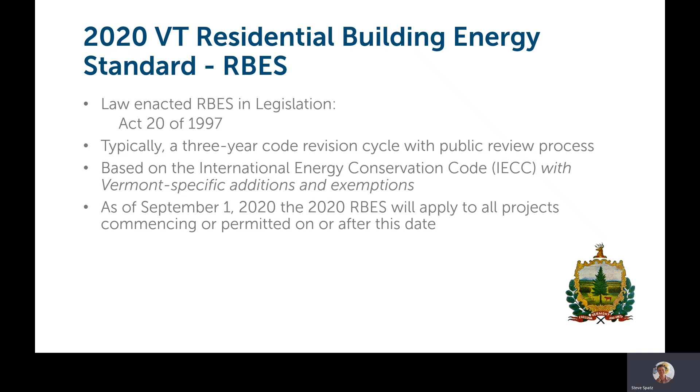The current code was put into effect as of September 1st, 2020. So any new buildings or additions, alterations built or enacted after September 1st, 2020 need to meet the requirements of the 2020 code.

There are 2 reference documents in regard to the RBES. There is the full language of the ICC published code, which can be found on the ICC website and through links on the Department of Public Service websites to get you there as well. And then Efficiency Vermont also publishes, in partnership with the Department of Public Service as the Energy Code Assistance Center, a handbook, which is a guide to interpretations of the code and how to apply the code for builders.

So an important distinction to understand. The full code document from the ICC is what should be referenced to ensure that a building is being built compliant specifically to what the law requires. So the handbook is an excellent guide to move you along that path, but the ICC document should be what is referenced for the law. Accessing this content, you can find this both through Efficiency Vermont's Trade Partners site, as well as through the ICC site directly, and the Vermont Department of Public Service website.

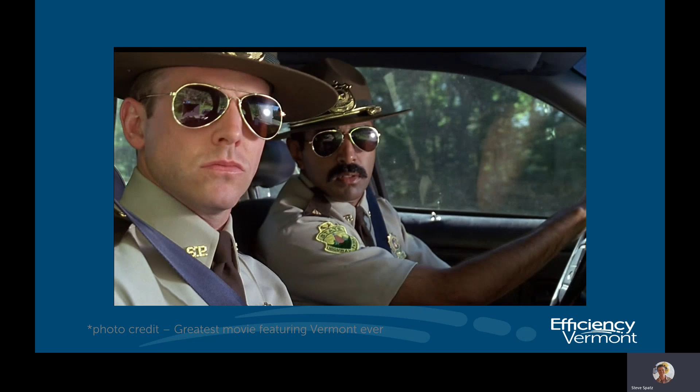So Efficiency Vermont's role is we are not the code police. We are here to support the understanding and application of code in Vermont. We support and run the Energy Code Assistance Center. So you can call this toll-free number to reach one of our customer support representatives who can help answer questions in regard to the code and or connect you with an energy consultant such as myself or someone else within Efficiency Vermont who can get into more detail with you in regard to code questions.

The Vermont Department of Public Service is the regulatory entity that basically owns the code here in Vermont. So any questions about the actual application of the code and implementation of the code would be directed to the Vermont Department of Public Service.

So 2020 Vermont RBES. Buildings that must comply are any new construction, low-rise residential buildings. So 1 and 2 family dwellings, any multifamily housing that's 3 stories or less. RBES does not cover commercial buildings. They are covered by the Commercial Building Energy Standard, which is revised on the same schedule as the RBES. If you have a mixed-use building with commercial application on the lower street level and then residential units above, both codes come into play in that circumstance.

Additions are treated as new construction buildings, so the addition needs to conform to the requirements of the 2020 RBES as if it were a new home. That does not mean that the rest of the building needs to be brought up to meet the requirements of the current code. Only the addition needs to conform. Renovations and alterations have their own requirements that are defined in Chapter 5 of the code under existing homes, as are repairs as well.

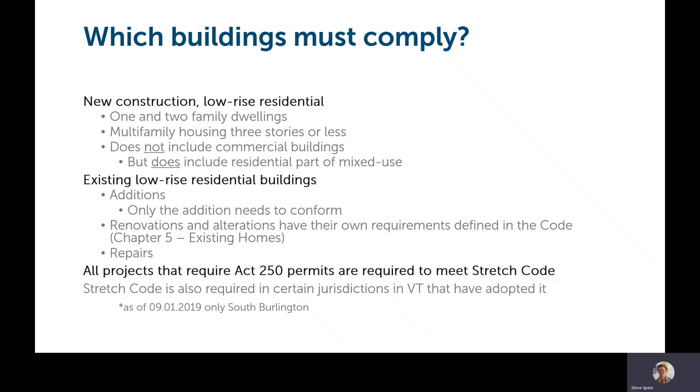If the project falls under the jurisdiction of Act 250, whether it's a development or if it is a specific circumstance where there's an Act 250 umbrella over the project, stretch code needs to be met, which is a higher level of performance than base code is requiring. And also the city of South Burlington has adopted the stretch code as their local requirement, more stringent than what the base code requires.

There are some exemptions in the code. Any unconditioned building, outbuildings, sheds, unheated garages, etc. Those are considered unconditioned buildings. Mobile homes have their own federal requirements. Seasonally heated or conditioned buildings, so that are not meant to be lived in year-round, and owner-built homes.

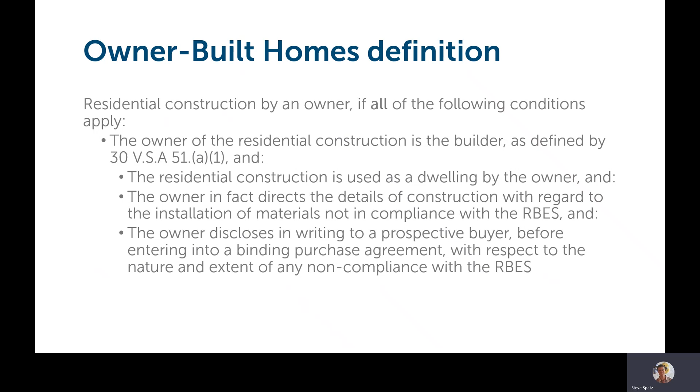Owner-built homes have their own distinct call-out in the code that is very specific. So if you are planning to build your own home, general contract it yourself, and live in the home upon completion, you're allowed exemptions from meeting the full compliance with the RBES code. You still need to complete a code certificate that details what was installed in the building, but there is an allowance there for alterations away from the strict requirements of RBES.

Liability is where the teeth of the code comes into play. There are no code officials in the state of Vermont. Efficiency Vermont is not a code enforcement entity. There is not that mechanism or regulation set up that way in the state. So unless there is a local code official who is overseeing construction in their jurisdiction, it is entirely up to the builder to verify and show compliance that the building has met the requirements of RBES in full.

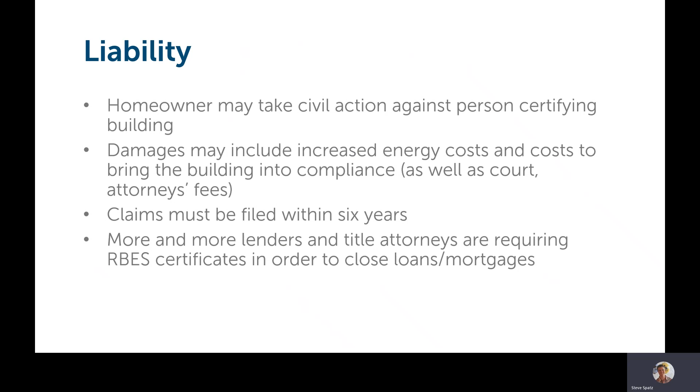A homeowner may take civil action against the builder or the person certifying the building as compliant with the code, or lack thereof, if they never completed the code certificate nor built the building to meet the standard. These claims can be filed within a period of 6 years. It doesn't mean that after that 6-year period a builder may not be liable for faults identified in the building that can be linked back to non-code compliance, but it would not fall under the direct jurisdiction of an RBES filing at that point.

There's two main components to the code. There's the performance requirements, which we'll cover in detail as far as the actual specifications for how the building is put together. And then there is a reporting compliance requirement, which is actually completing a certificate that details the components of the building and verifies that the building has met in full the requirements of the RBES. That document is required to be completed in full by the builder or engineer or whatever entity is basically in control of the outcomes of the project.

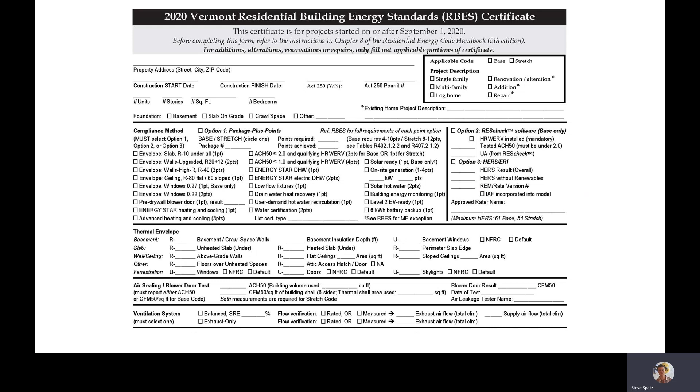This document needs to be completed in full, signed, and then a copy of it filed with the town that the home was built in, or the retrofit, or whatever applicable project type was done in. It needs to be reported in the town records, and then a copy of the code certificate also submitted to the Vermont Department of Public Service for public record. And then a copy of this certificate will be posted within the home, somewhere in a conspicuous area, typically in the utility room, that will stay with the home.

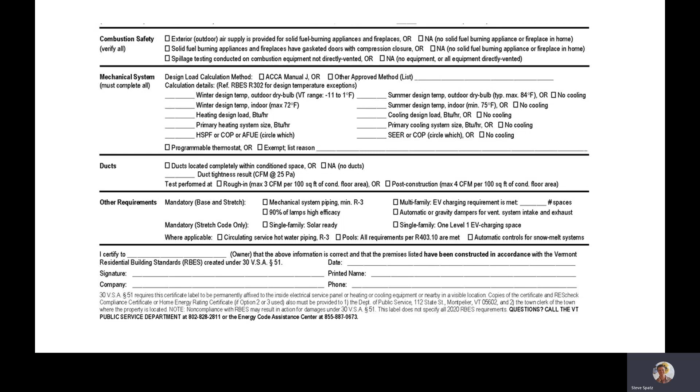So, general requirements structure for how the code is put together. The Vermont RBES is laid out in the manner that typically all model codes written by the ICC are. It's written as a design document. The chapters basically go from design and specification through to project completion. So if you reference the code that way at the design stage, rather than trying to figure out how the building met the code upon completion, you'll have more success in actually meeting the full requirements of the code.

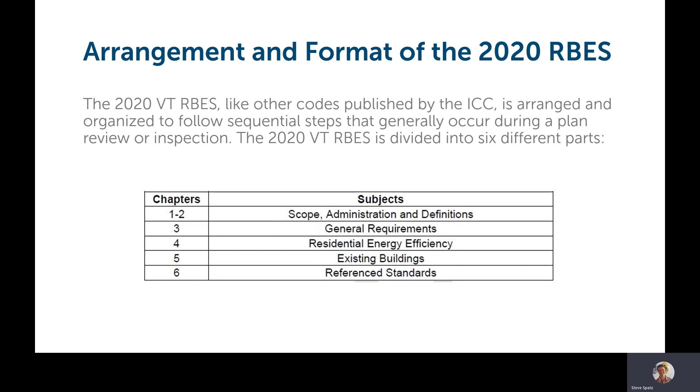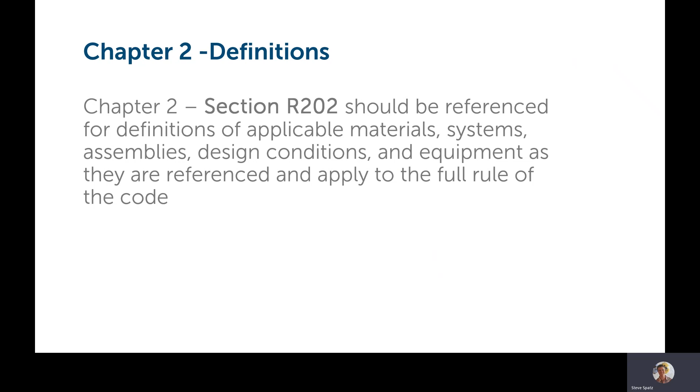So there are 5 chapters of content, and then the 6th chapter has reference standards that are used within the document. Chapter 1 is scope and administration, basically covers the administrative side of the code. Chapter 2 is essentially a glossary of terms, materials and conditions. Basically anything referenced in the code is defined in chapter 2. Chapter 3 covers details for design conditions and mechanical and material systems to be used in the building, design criteria for whole house ventilation systems, and details around combustion safety.

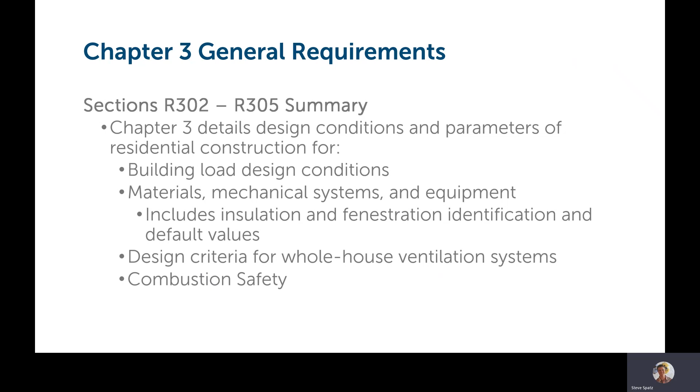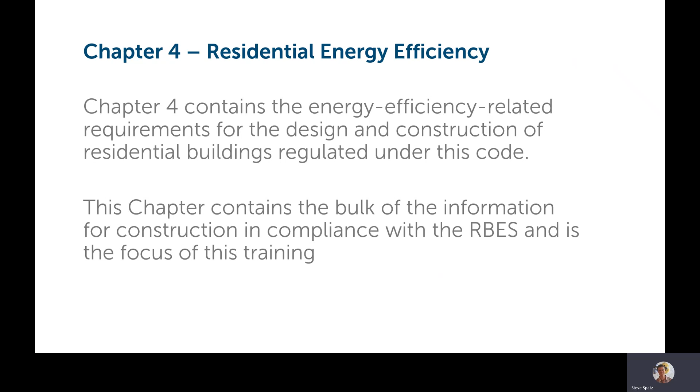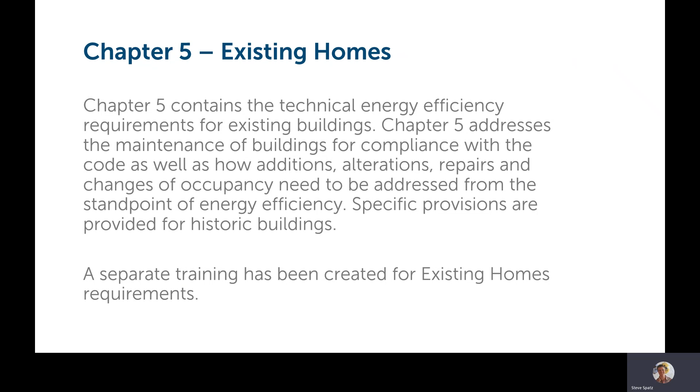The bulk of the performance requirements in the code are contained in chapter 4. This is where most of the actual specification and installation requirements are detailed. Chapter 5 is specific to existing homes and basically references back to content in chapters 3 and 4 and how they apply to an existing building project, whether that's an addition, alteration, repair, or change of occupancy. Then finally, chapter 6 is just an index of industry standards that are referenced in association with the requirements of the Vermont RBES.

So getting into the details of the actual specification and compliance requirements for new construction and additions. The reference section numbers come directly from the ICC code document. So if you look into the ICC website and look for these section areas, you'll be able to reference the full content from the code.

So there are 3 options to comply with the code. You have a package plus points or prescriptive compliance method that is allowed. That's detailed in sections R402 through R404. Alternatively, a builder can choose to use REScheck software, which is an online web-based energy modeling tool that you input your building component specifications to, and it will give you a numerical index as to whether or not what you're planning to build and those specifications will meet the intent of the code or not.

And finally, the third option to show compliance would be to work with a third party by hiring a home energy rater or HERS rater who will do building energy modeling and verification of measures installed on behalf of the builder, and essentially provide the builder then with documentation upon project completion that will be used to show RBES compliance.

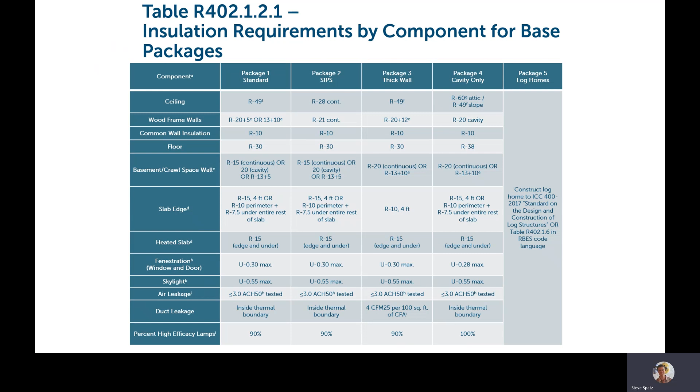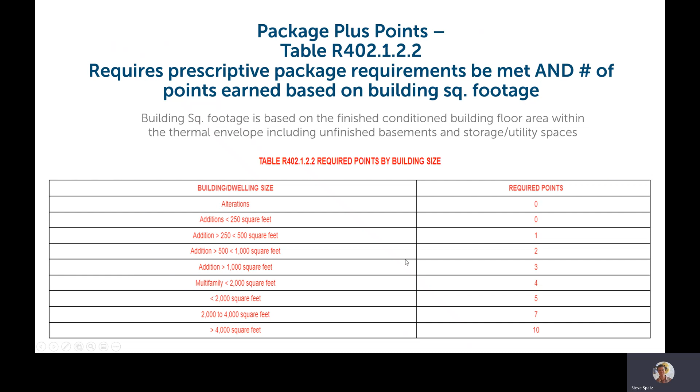From here, you need to earn points that improve the outcomes of the building beyond what's called for in those prescriptive packages. And those points are based on the square footage of the home. So this table, R402.1.2.2 in the ICC code, gives you the parameters of points needed based on size of the home. So the bigger the house or the addition, the more points are needed.

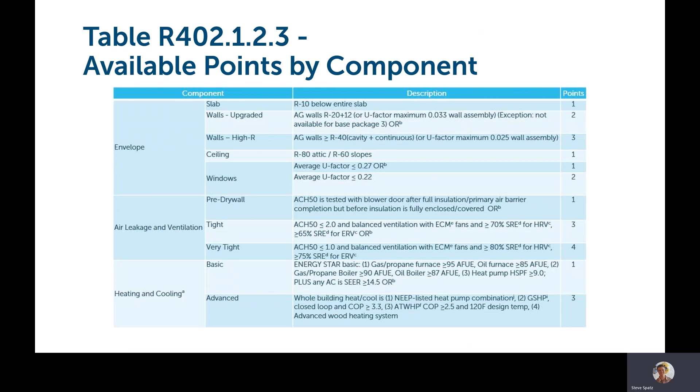That's followed by another table in the code, which gives you your options for obtaining points. So you can improve aspects of the building envelope to obtain points. You can improve the air leakage rate of the building envelope by making the building tighter and putting in balanced ventilation systems to gain points. You can put in efficient heating and cooling equipment to gain points. You can install low flow fixtures within the home as a way of gaining points, options with renewable energy and other forward-thinking measures that can obtain you points as well.

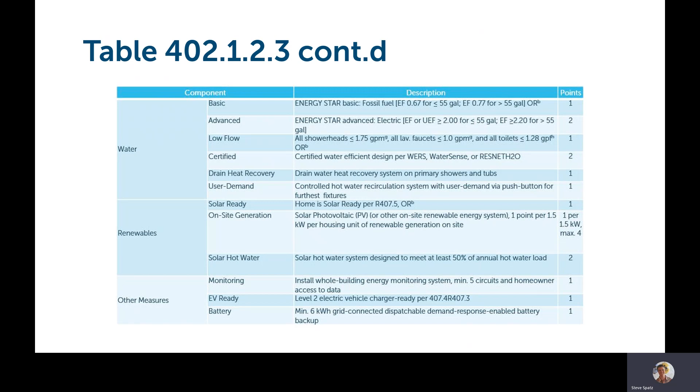So that is the requirement. You need to pick a package, meet the full specifications outlined in that package, determine how many finished square feet the building is, and figure out how many points you need to obtain, reference this table to obtain those points, and then follow the installation mandatory requirements, which we'll cover here momentarily.

Alternatively to that prescriptive package approach, as I mentioned, a builder can choose to use REScheck software. This is detailed in section 405 of the code. So this is in place of following the specifications in one of those packages. The builder can go to the site that hosts the REScheck software, which can be found at this link directly, or you can go to the Vermont Department of Public Service website and be linked to that REScheck software from there.

And then this gives you the option of inputting performance criteria into the software and kind of trading options to show whether or not your building meets the standard based, again, on a numerical comparison of what a base compliant code would require versus what your specifications are that you're inputting into the software.

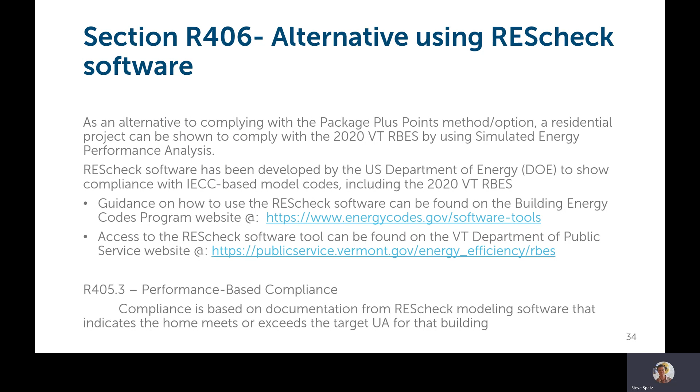Finally, as an alternative to that, again, is to work with a third-party HERS rater, which would mean hiring a RESNET certified rater who will take your plans and specifications, again, ideally at design stage, to review. They will be able to do a preliminary rating for you at that point, which will show where your building plans and specification land in reference to code compliance and whether or not what you have designed will meet, in fact, the code if it's built.

At that point, you can make any adjustments or changes to the building specifications to make sure that it complies with code. And at that point, you can move forward confidently with construction, knowing that what you're building will comply with the code upon completion. This method requires that HERS rater come in and do a mid-construction inspection after insulation measures have been installed, and then come out and do final performance testing on the building and documentation in order to provide the final documentation to show code compliance.

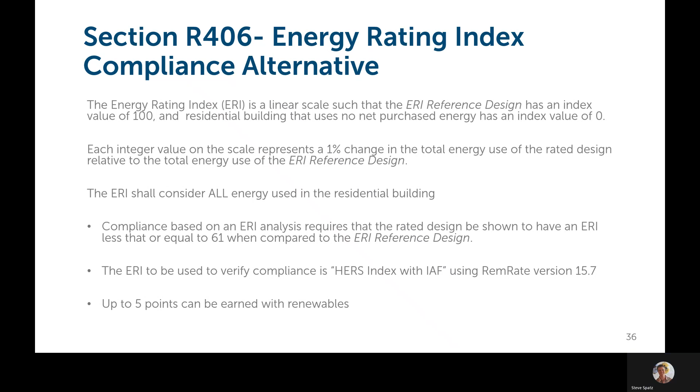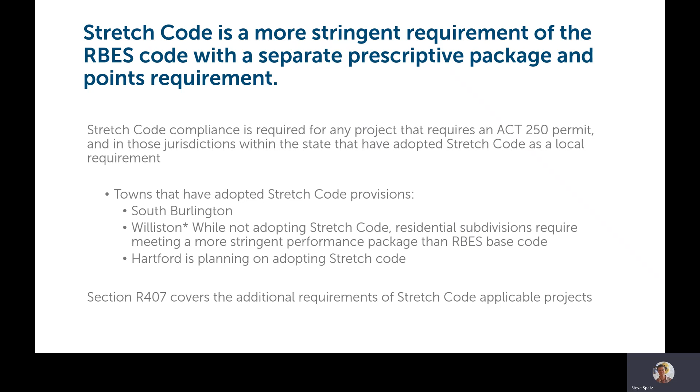Stretch code, again, comes into play if you have a building that is being built that lands within the jurisdiction of an Act 250 permit, or if you're building within the town of South Burlington, as South Burlington has adopted stretch code as their local requirement. So stretch code essentially is upping the ante on what the base code requires. So you can meet stretch code prescriptively by using the package plus points approach, though you're limited to 3 packages instead of 5 with stretch code.

And you can see here in stretch code that you have to do continuous insulation on above grade walls, whereas the base code in package 4 allows you to just still do cavity only insulation. It requires you to have a little bit better foundation wall insulation, depending on the package, a little bit better windows, and more importantly here is you're required to put in balanced heat recovery ventilation, whereas base code you're still allowed to use exhaust only if you so choose.

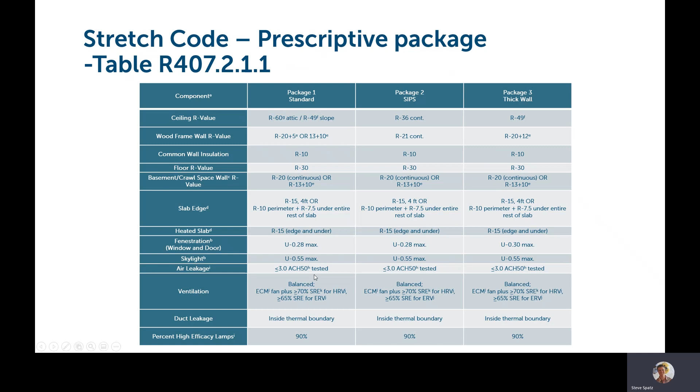So same approach here, you pick one of the 3 packages, meet the full criteria of that package as your base requirement. Then depending on the square footage of the home, you need to obtain points again from a separate table based on the square footage. I don't have that other table shown here, but there is a specific table in the code for stretch code that looks the same as the base code points table, but is specific to stretch.

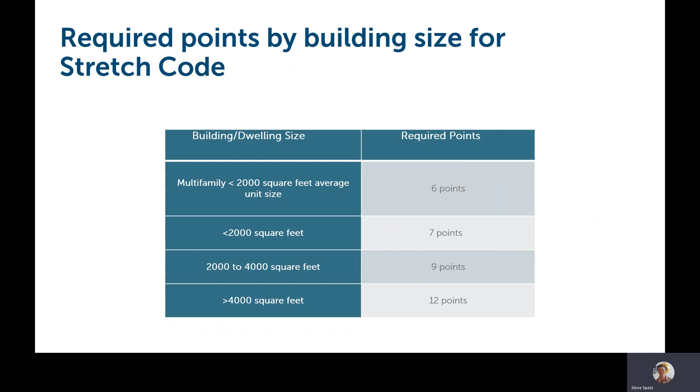One difference with stretch code compliance is that you cannot use REScheck software to show compliance for code. You have to either use the package plus points approach or hire and work with a HERS rater to show compliance. So you're restricted to those 2 compliance options when needing to comply with stretch code. So package plus points approach, again, same as base code. Pick one of the 3 packages, determine the number of points, and then incorporate a sufficient number of those points into the building specification from the specific stretch code table to show compliance.

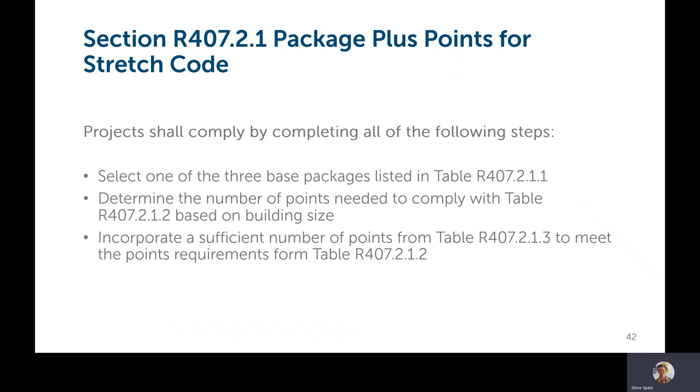The difference in the HERS score requirement for stretch code is that base code, you need to have a maximum HERS rating of 61, whereas for stretch code, that maximum HERS rating is 54.

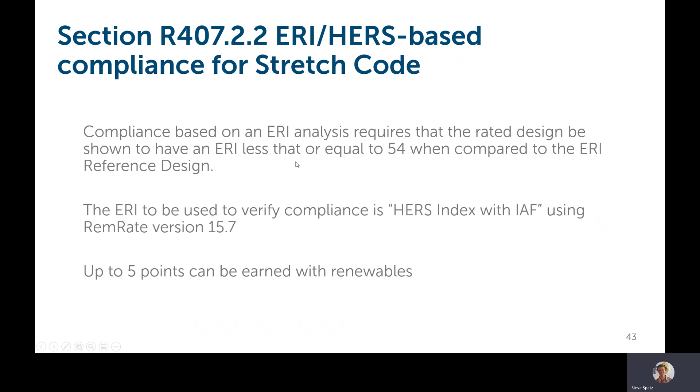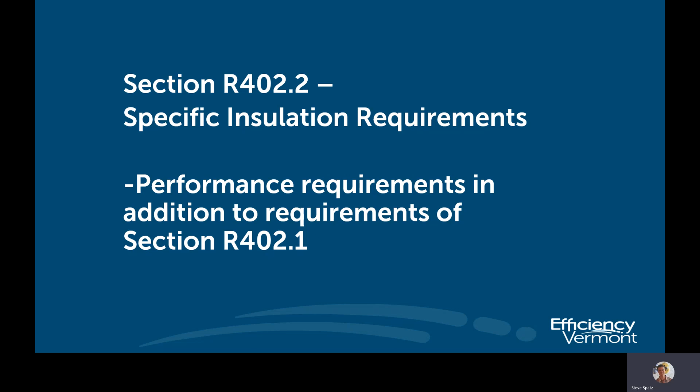So that details the specific component requirements for meeting the code, as in R values and U values and air leakage rates, et cetera, for the building envelope. But then there are also mandatory performance requirements that are called out within the code. So this essentially means how materials and systems and equipment is installed in the building so that it actually performs in a way that's designed to work. So this section covers some of the more distinct or prominent mandatory details and installation requirements called out in code, but it's not a fully inclusive list. So the full list of mandatory requirements can be found in this section R402.2.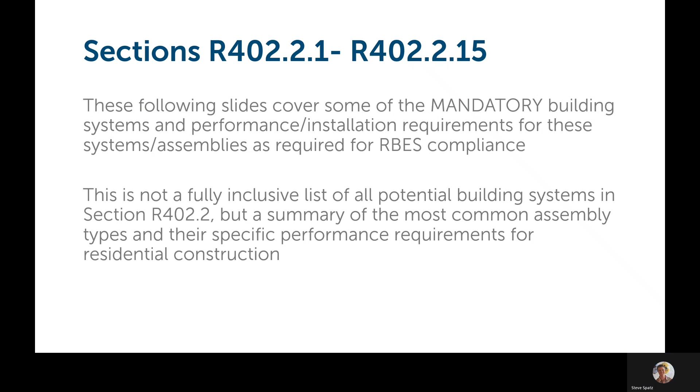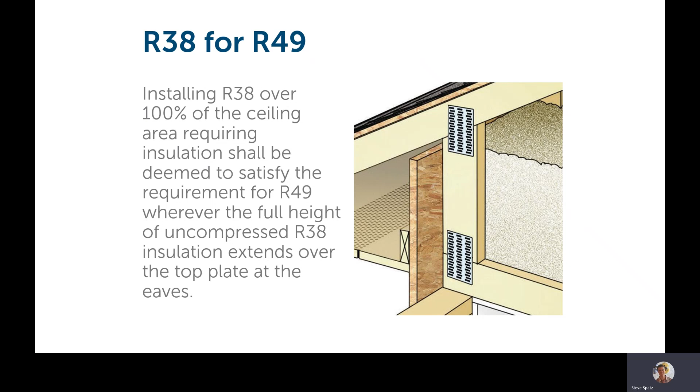So we'll start with an exemption. So where the code requires in the prescriptive tables a minimum R value for an open attic space of R49, R38 is permissible if that R38 insulation carries fully over at full height, uncompressed over the top plates of the exterior walls. So that's an allowable exemption to R49, is to have a uniform thickness of R38 throughout the whole attic space. The same exemption exists for R60, where R49 can be allowed, again, if it's a full uncompressed height over the top plates of the exterior walls.

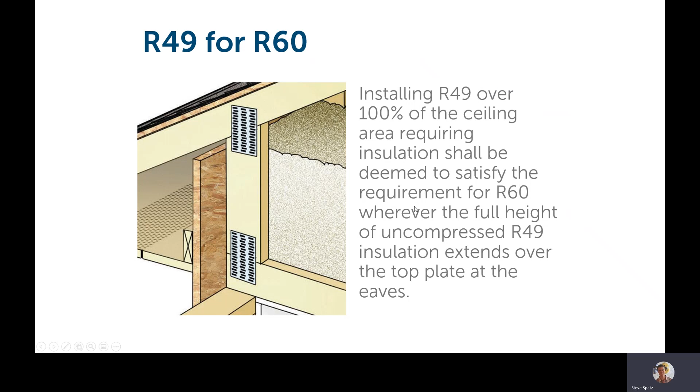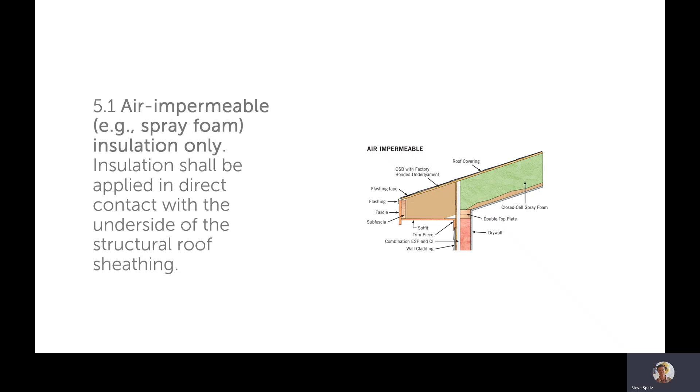Section R402.2.1 covers in detail unvented roof assemblies. So again, R49 is the minimum R value for any roof assembly, attic assembly, whether it's an open attic or if it is an enclosed rafter assembly. So there are 3 options for doing unvented enclosed roof assemblies. One option is air impermeable insulation. So essentially closed cell foam to fill the cavity to an equivalent R value of R49, whereas that insulation needs to be in direct contact with the underside of the roof deck.

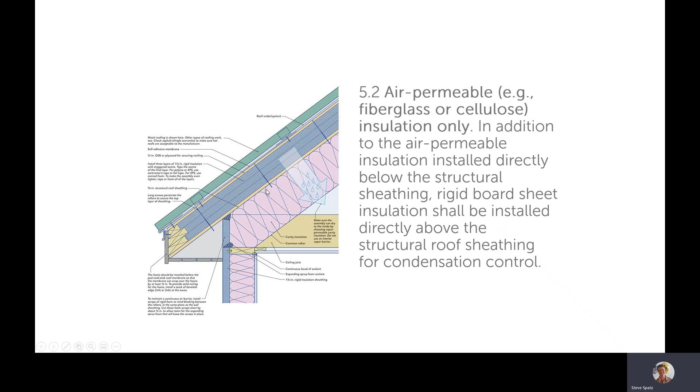An alternative to that is to do cavity fill insulation within the rafter cavity of any insulation type, and then add what is equivalent to half of the R value of what's in that cavity in rigid insulation board above the roof deck to prevent the roof deck from becoming a condensation point within the overall assembly. So that's another alternative for unvented roof assembly.

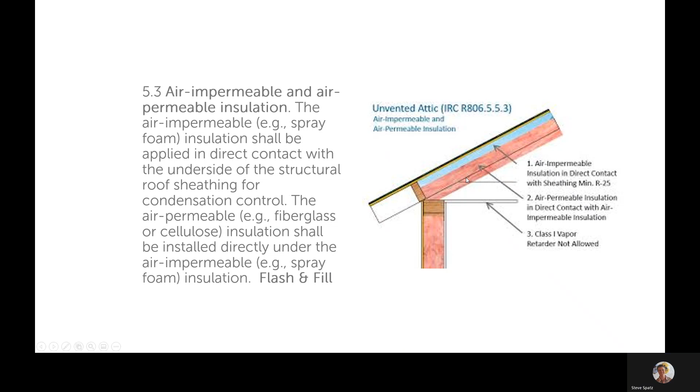And then finally, a mix of air impermeable and air permeable insulation, more commonly known as a flash and batt or flash and fill insulation, where you're getting half of the overall R49 R value in a closed cell foam insulation that is in direct contact with the roof deck. And then the balance of the R value is made up with another insulation type of fiberglass, cellulose, rock wool, open cell foam to get to your R49 minimum.

Eave baffles are required in any attic or roof assembly type to prevent wind washing from the soffits and the eaves. So this is a mandatory requirement for any attic or roof assembly.

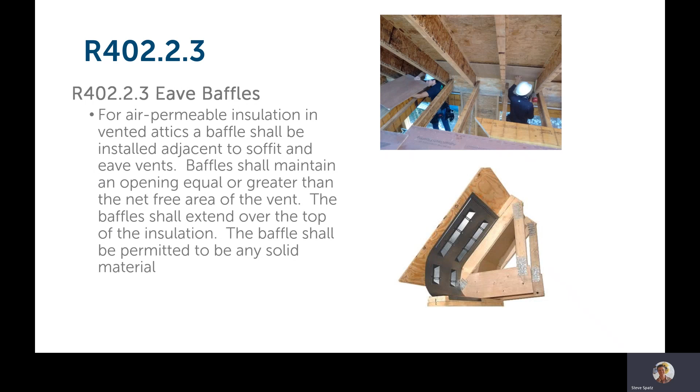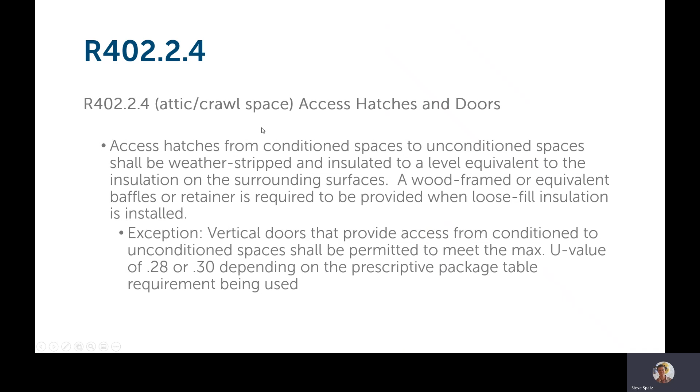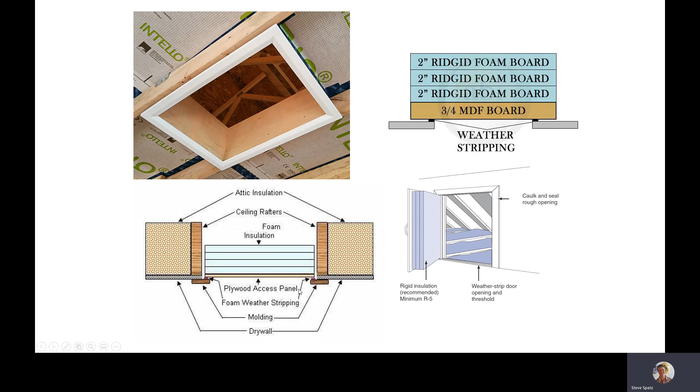Access hatches or doors need to be treated as exterior entry points to unconditioned space. So they need to be treated in a manner of equivalent R value to the assemblies that they're being installed in. So an equivalent R value or close to it of what the R value requirement is for the knee wall or attic space that the access hatch is located in. The access hatch needs to be installed against a compressive weather stripping to prevent air leakage through the panel and getting around that to the outside.

Any exposed floors that are over truly unconditioned space or cantilevered floors require that the insulation in those cavities be in direct contact with the conditioned side of the assembly. So the warm side of the assembly, there cannot be an air gap between the insulation and the finished floor above.

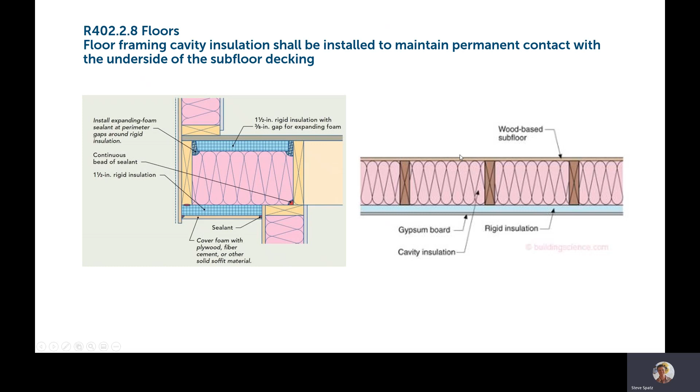Foundation wall insulation needs to be at a minimum of 10 feet, basically the full wall height to 10 feet. So if you somehow have a foundation wall that is greater than 10 feet, the insulation needs to at least come down to 10 feet below grade or to full wall height if it's less than that.

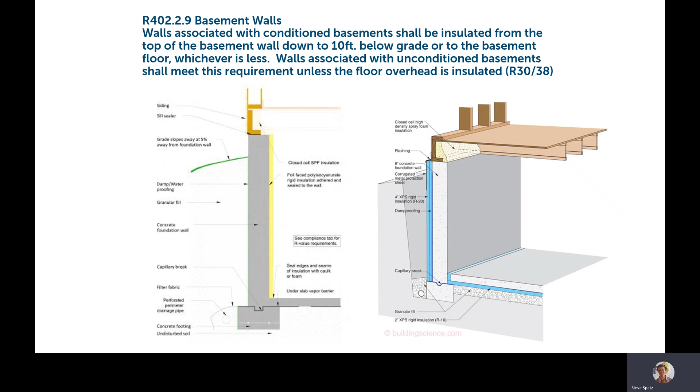There are no requirements as to where and what side of the foundation wall foundation insulation is applied. It can be installed on the inside, it can be installed on the outside, it can be installed in between. It can be a framed wall with cavity fill insulation. So there are many options for insulating foundation walls.

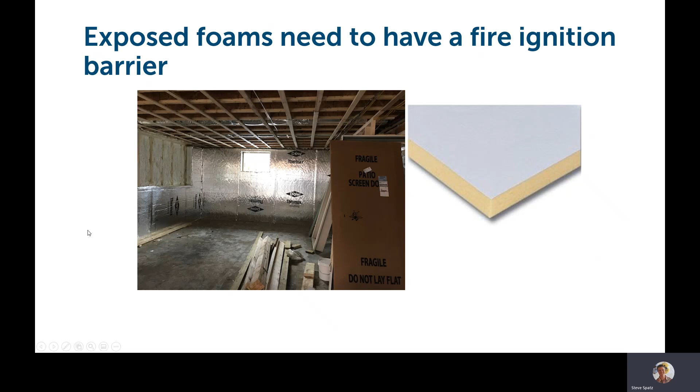Any exposed foams that are within a space that is accessible to the occupants or for service needs to have an ignition barrier facing on the foam or something else covering it to prevent ignition of the material. So this goes for open attic spaces where exposed foams would be in place, knee wall access points, basements, crawl spaces, etc. So the ignition barrier needs to be in place over the exposed foams.

Slab on grade floors. So a slab on grade is considered any floor surface that's less than 12 inches below grade. Needs to be insulated with the requirements called out for in the prescriptive tables of R15 down to a minimum of 4 feet. And that 4 feet can be either vertical or it can be a combination of vertical and underneath the slab. So you basically need to insulate at least 3.5 to 4 feet below the slab at the perimeter of any exposed foundation or slab. So this applies for a slab on grade home or a walkout section of a basement in a full basement type setting.

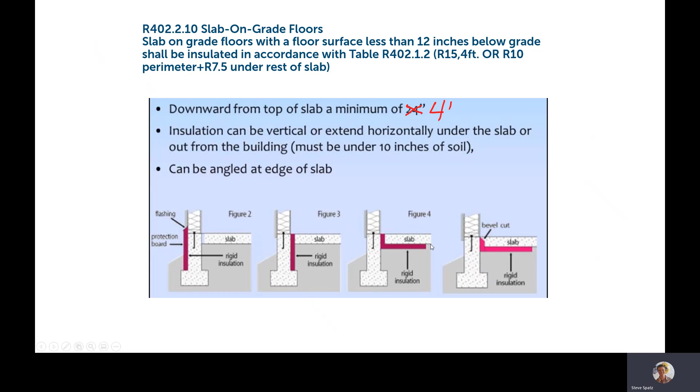There is an exemption in the table R402.1.2 for R10 as the vertical slab edge insulation, and then R7.5 underneath the entire slab as an alternative to doing R15 at the slab edge only.

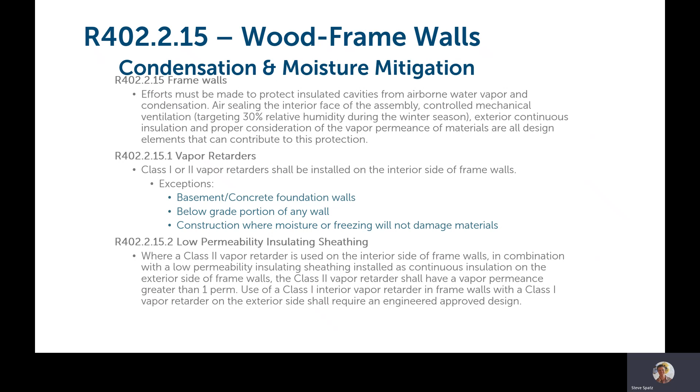Condensation and moisture mitigation in wall assemblies is a bigger part of the picture of the building science side of the code, and there are specific requirements called out in the code in regard to vapor retarders. So different classes of vapor retarder types, class 1, 2, or 3, depending on the wall assembly over which that vapor retarder will be installed. But measures need to be put into place to prevent the bulk loading of interior moisture vapor into building assemblies to prevent the concern of condensation from occurring within these building assemblies.

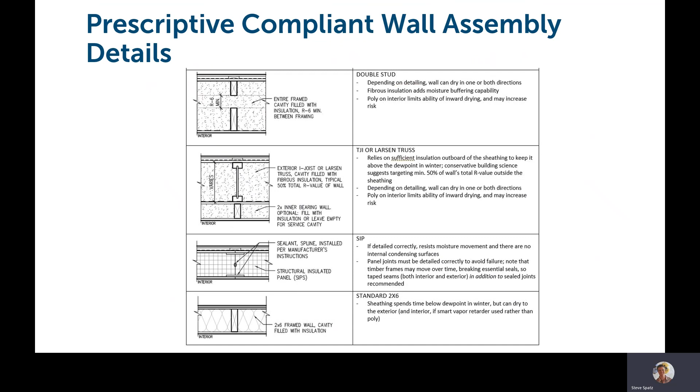There's a lot of good content in the code handbook that I mentioned that goes into detail about moisture safe building assemblies. So there are these construction details illustrated in the handbook, different ways of approaching continuous wall insulation assemblies that are considered moisture safe, condensation safe. So a great reference to have and to look at in interpretation of the code. And then there are also some examples of what not to do when doing continuous insulation as well.

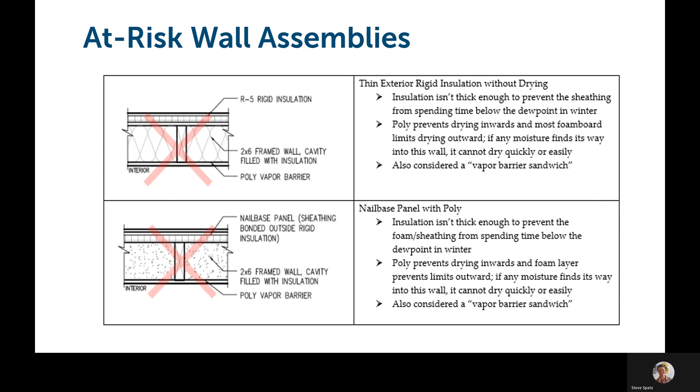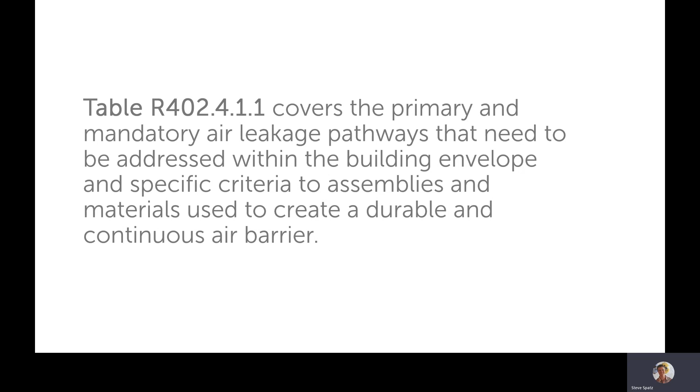Section R402.4 details the specifics of the air leakage requirements for the building envelope. So this covers the primary and mandatory air leakage pathways that need to be addressed in the building envelope to meet the 3 ACH or 2 ACH criteria that are called out in base code and stretch.

So this section covers in detail the different material types that can be used or should be used as air barrier material and the ways of combining those materials together to create a uniform, unbroken barrier around the full perimeter of the building envelope.

The 2020 RBES does require that the air leakage of the building envelope is tested and verified upon project completion by a third party to verify that the building does in fact meet the 3 ACH or 2 ACH maximum air leakage rate. So this is no longer just a builder verified component of the code. It is actually something that needs to be done by a third party blower door test to verify and document that the building did in fact meet those maximum air leakage rate requirements.

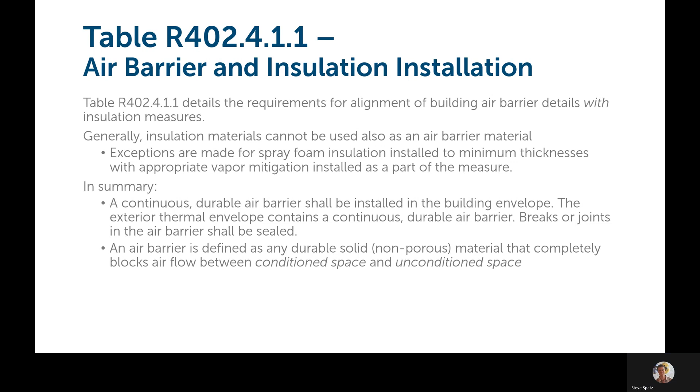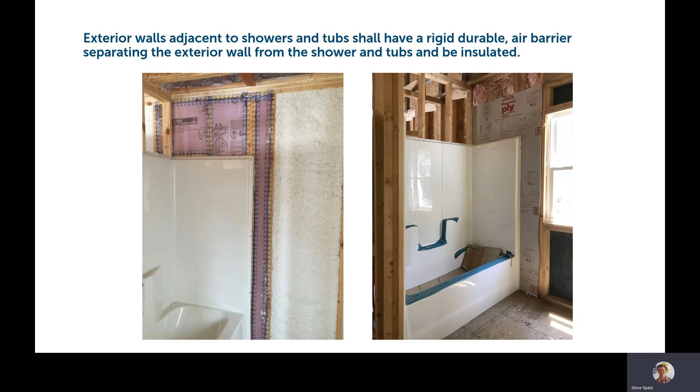So these are just some details to be aware of within the building that are specifically called out. So any shower or tub assembly that's adjacent to an exterior wall needs to have a rigid air barrier separating the bathroom space from the cavity insulation behind it. Otherwise, that wall is guaranteed to have moisture and mold and potential structural failure at some point in its future.

This is another image pulled from the RBES Handbook. So these are two illustrations of section details that show specific details of how to do an exterior defined air barrier versus an interior defined air barrier. Again, it's an assembly of parts, so it's important to understand where the different details come into play to make it uniform.

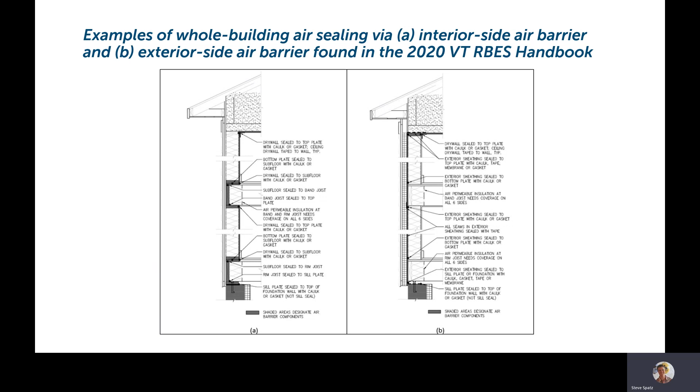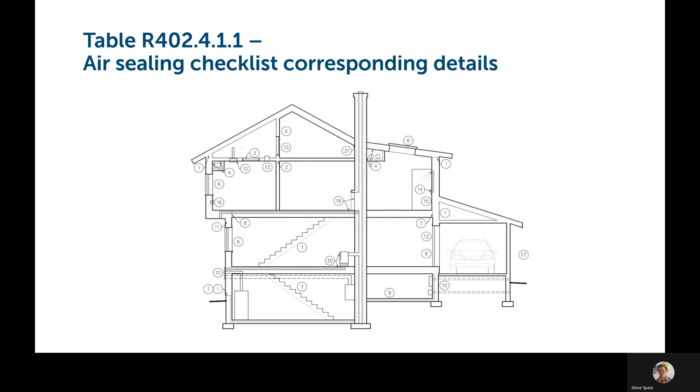As well, in the handbook, there is a checklist that goes into specific detail about all of these transition areas and changes in the building envelope that need to be addressed to meet the full criteria of the air leakage requirements, and to ensure that when that testing is done upon project completion, you will not exceed the 3 ACH or 2 ACH maximums. And to just reiterate that, this is the language from the code that details that testing requirement as required by law here now moving forward for any new construction.

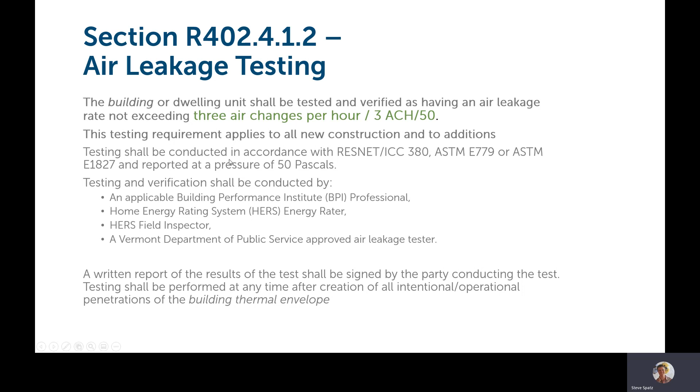Any wood burning fireplaces or wood stoves need to have tight fitting doors to seal off the firebox from indoor air, and also have outdoor combustion air piped directly to the firebox. So we cannot rely on combustion air coming from within the building for the combustion of the wood in the firebox and for the exhausting of those smoke and byproducts up the chimney. Outdoor air is required, and a sealed gasketed enclosure is required.

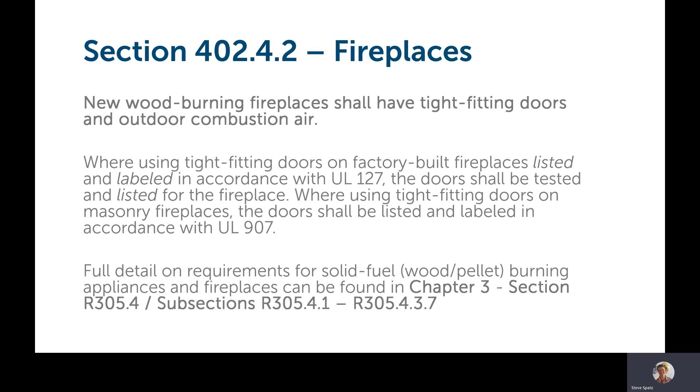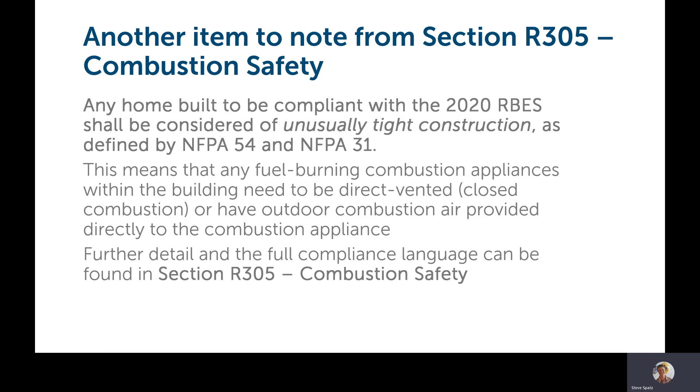And another note from section R305 is that any new construction built to meet the full requirements of the Vermont 2020 RBES shall be considered of unusually tight construction by the fuel regulations for combustion safety and combustion requirements for closed combustion systems. So basically any equipment going into a building meeting the requirements of the 2020 RBES needs to be closed combustion, not open combustion.

Finally, in Chapter 4, Section R403 details the system requirements for mechanicals in the building. So this covers the sizing requirements for both design load and system sizing, equipment sizing, as well as duct design, insulation, and installation, domestic hot water piping, mechanical ventilation, snow melt systems, controls, thermostats, etc. So it's essentially the mechanical system requirements of the code.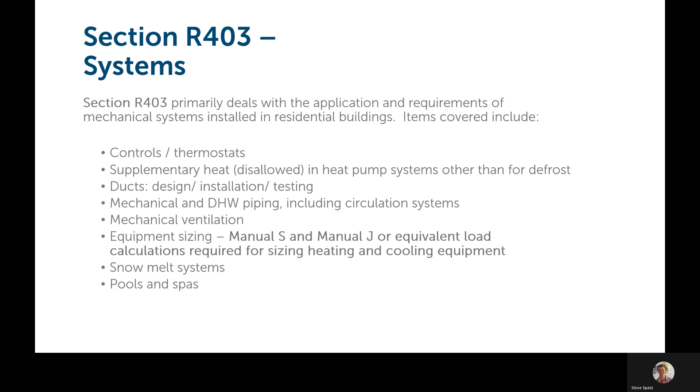In Chapter 3 as well, Section R304 covers the design criteria for residential ventilation systems. So whole house ventilation is mandatory in RBES, both for base code and for stretch code. So every home needs to have a whole house ventilation system, and that can be either exhaust only or balanced for base code, whereas in stretch code you're required to use a balanced system.

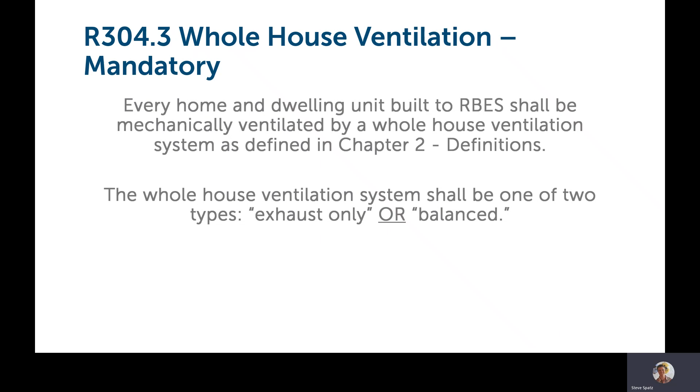So in base code, you can show compliance either prescriptively in reference to a table I'll show you next, or you can actually do a calculation design for the specific needs of the building based on the square footage, number of occupants, exposure of the building, building envelope, air leakage, etc. And the three methodologies that can be used to define that ventilation rate for the specific building are ASHRAE 62.2, the Building Science Corporation Standard 01/2015, or the Passive House Ventilation Standard.

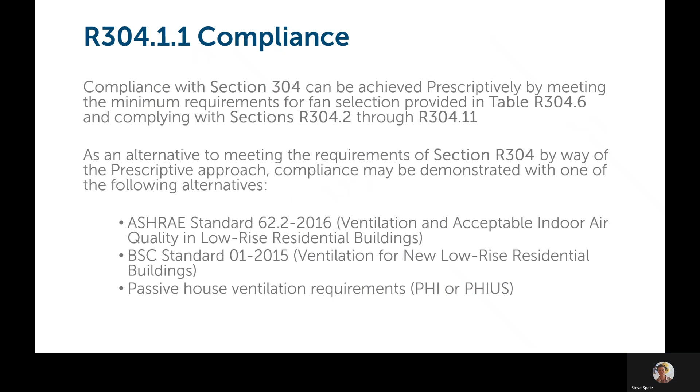But that being said, there is a table in the code, R304.6, that allows you to comply with the mechanical ventilation whole house requirements prescriptively, meaning that you can put in a single bath fan rated at 100 CFM in a 3-bedroom house, no matter how big the house is in square footage, no matter how many occupants, and you can be compliant with the requirements for whole house ventilation, so long as that exhaust only system has controls that allow that fan to come on automatically throughout the day to provide at least exhaust side ventilation of the building.

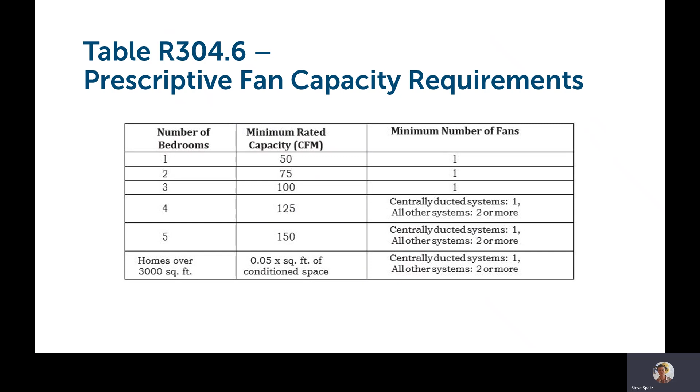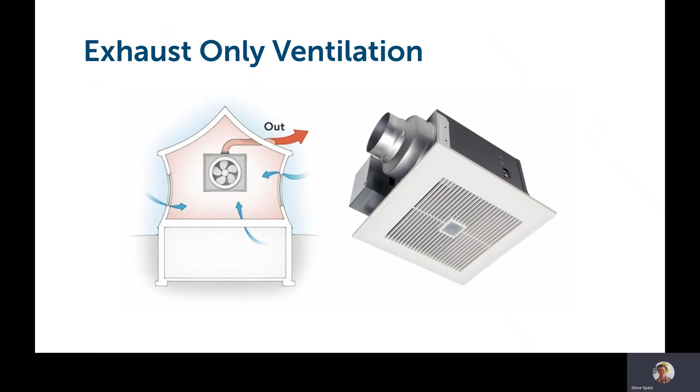So an exhaust only system is literally just sucking air out of the building, and you're relying on leaks that exist in the building envelope to bring in your outdoor air, fresh air exchange into the building. In a home built to meet the 2020 RBES, you will more than likely end up depressurizing the building if you're relying on an exhaust only system. So you're going to create negative pressure in the building when the bath fan is running. That can be a problem when you're trying to use a wood stove or a fireplace, or potentially backdrafting other equipment in the building. So it's allowable by code, but it is by no means ideal for where we're at with building envelope performance.

Alternatively, you can use a balanced ventilation system where you're extracting air from bathrooms, kitchen, mudroom, point source areas where you're going to have bulk moisture building up in the building. And at the same time as you're exhausting that CFM of air to the outside to remove that moisture and other pollutants from the home, you're bringing in an equivalent amount of fresh air from the outside that is being ducted and piped into bedrooms and living spaces. And those two air streams cross paths in a heat exchanger box where the outgoing airstream exchanges its heat with the incoming airstream and conditions that fresh air to be ducted throughout the whole building.

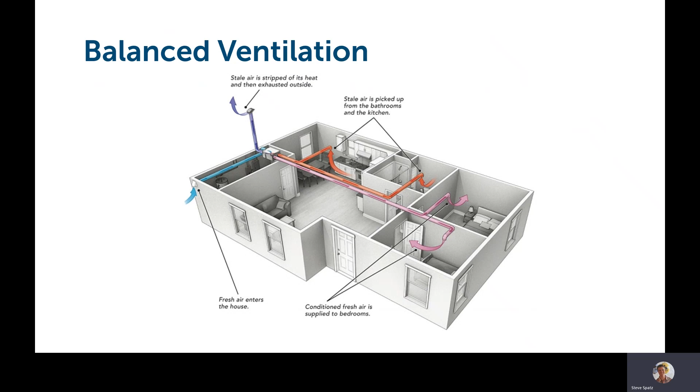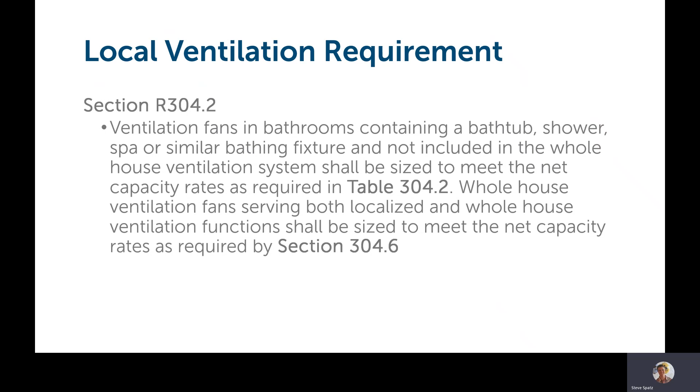No matter which whole house ventilation system type you choose to go with, whether exhaust only or balanced, you are required to meet a minimum CFM in bathrooms that contain a shower, tub, spa, anything that generates bulk moisture. That minimum ventilation requirement is 50 CFM if it's going to be a standalone exhaust fan in the bathroom that's operated on a switch, known as intermittent, or if you're using a whole house balanced system, that system needs to move a minimum of 20 CFM if it's going to be running continuously to provide the local ventilation exhaust requirement.

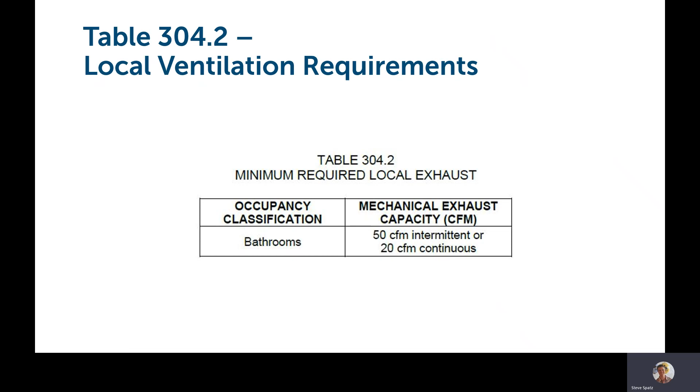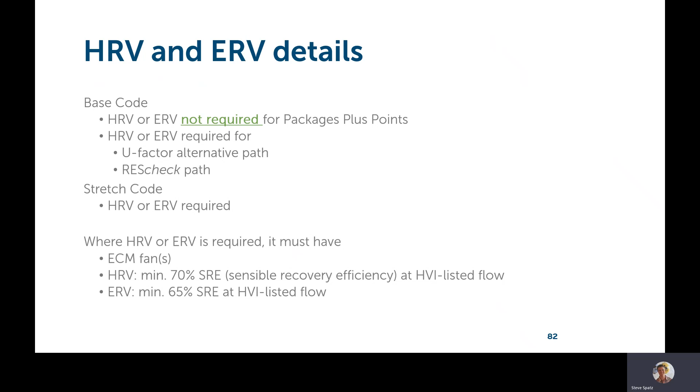So in summary, to meet the base code, an HRV or balanced ventilation system is not required if you're using the packages plus points approach. If you're going to use REScheck, you are required to use balanced ventilation. You cannot do exhaust only. If you need to meet stretch code, then an HRV balanced ventilation system is required. That being said as well, in the code, if an HRV or ERV balanced ventilation system is required, it must have an ECM motor fan, and it must meet a minimum performance requirement of 70% heat recovery if it's an HRV, or 65% heat recovery if it's an ERV. And you'll find that information at the Home Ventilating Institute listed flow rate that can be found online at hvi.org.

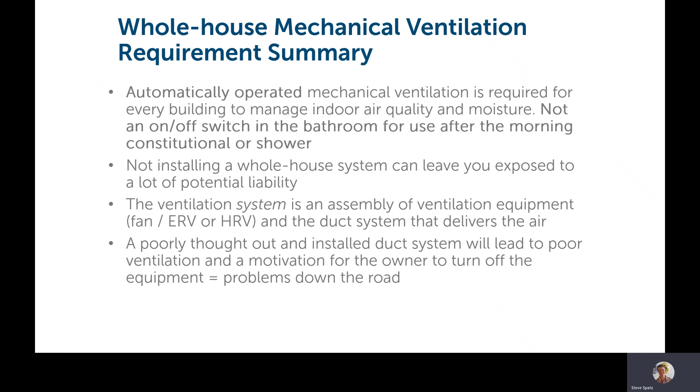So in summary, whole house ventilation system means an automatically operated ventilation system required for any building. It cannot just be an on-off switch in the bathroom for use by the occupant at their leisure. It needs to be something that runs automatically throughout the day to provide air exchange. The consequence for not having these systems installed is inevitably a high relative humidity within the building that can lead to, if not significant issues with condensation within wall assemblies, more often than not condensation on windows, which can be hard to manage any other way than by having a good ventilation system installed in the building.